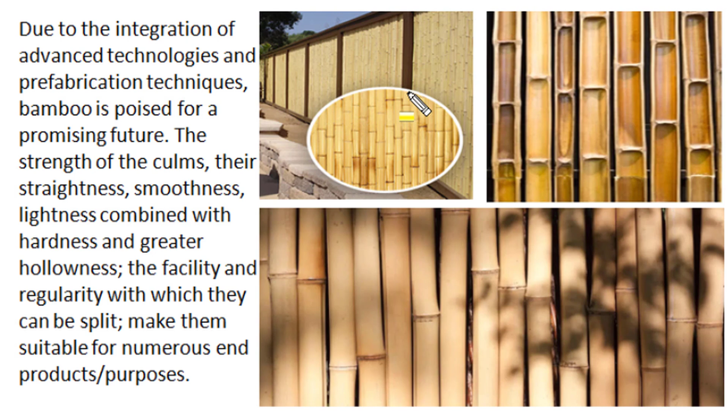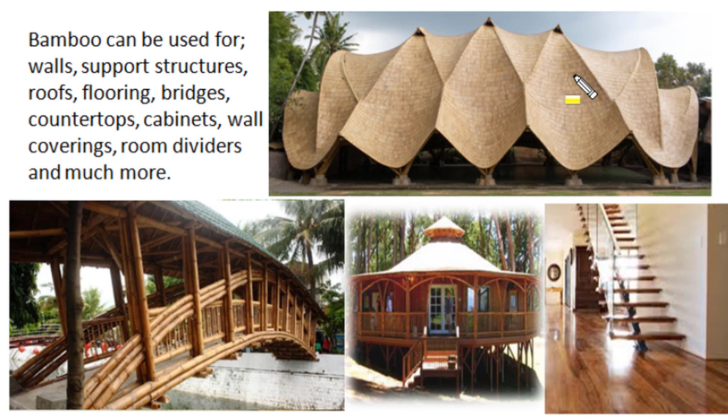The facility and regularity with which they can be split make them very suitable for numerous construction related products and purposes. Bamboo can be used for walls, support structure, roofs, floorings, bridges, stairs, cabinets, wall coverings, room partitions, and much more construction applications. Let us understand strength of bamboo.

Technically, bamboo is a fast growing Poaceae family grass, and in between two nodes in internode region, bamboo poles are hollow on the inside, but due to septa structure at node, bamboo got very good stability. If we understand cross section of bamboo, bamboo got short lengthwise fibers arranged in a typical manner to provide good enough strength to bamboo culms, which makes bamboo culms particularly sturdy, resilient and flexible. And with time, when it becomes dry, it becomes harder.

So we can say bamboo is a lightweight construction material with exceptional strength. The hollowness in internode region provides lightweight to bamboo, and its strong thick wall provides good enough strength, and at node the typical structure provides stability and strength to bamboo culms.

We can say bamboo got a combination of both compressive strength just like concrete and tensile strength just like steel. So this material bamboo got dual property of concrete as well as steel. This makes it a very suitable material for building bridges and other structures that require support and stability.

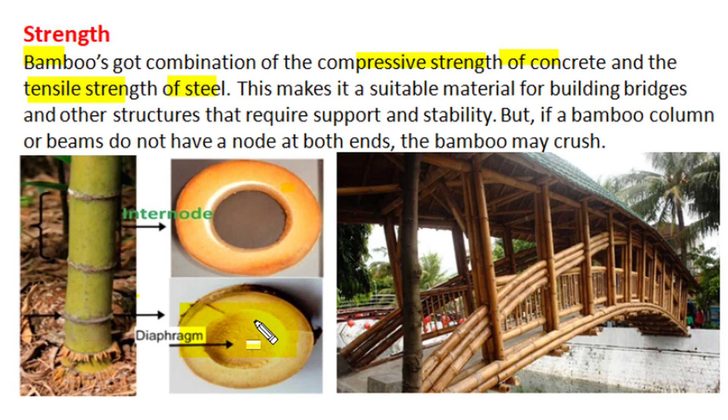But if a bamboo column or a bamboo beam do not have a node at both ends with this typical cross section, the bamboo may crush. So while selecting column height or beam length, we have to select a typical bamboo with node at both ends.

Bamboo building structures can have very good flexibility and resilience, and that makes them, with their lightweight, ideal construction material for seismic active areas for building construction. Bamboo can withstand heavy loads as well as extreme weather conditions. Bamboo poles can be used as columns or beams in construction of any house or other building, and bamboo provides a strong and stable structure to that construction.

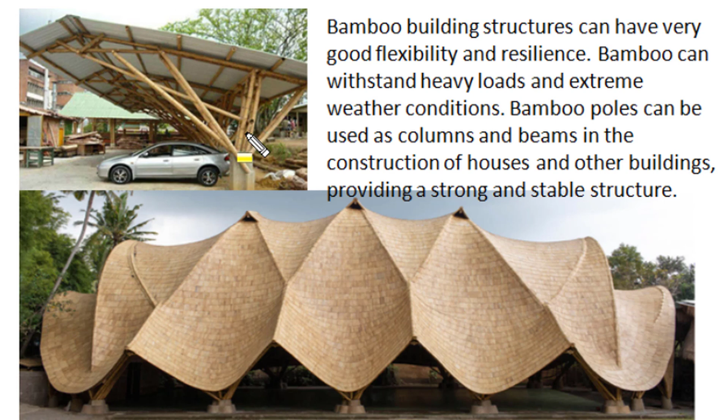Let's understand durability of bamboo. Bamboo is naturally resistant to water damage, decay, or other weather related wear and tear during cultivation and up to harvesting. And if it is properly treated and dryness is ensured, it can remain strong and sturdy for many years without much maintenance. If bamboo is properly used in dry state and treated for sugar removal, it can also resist pest and rot attack, and that makes a very durable and long lasting application of bamboo in any construction project.

If after water leaching of bamboo culms they are treated in borate solution and then a slow and steady uniform drying process is carried out, then with that proper treatment and afterwards little maintenance, bamboo structure can last up to 20 to 50 years, and some structures are in existence after even a longer period.

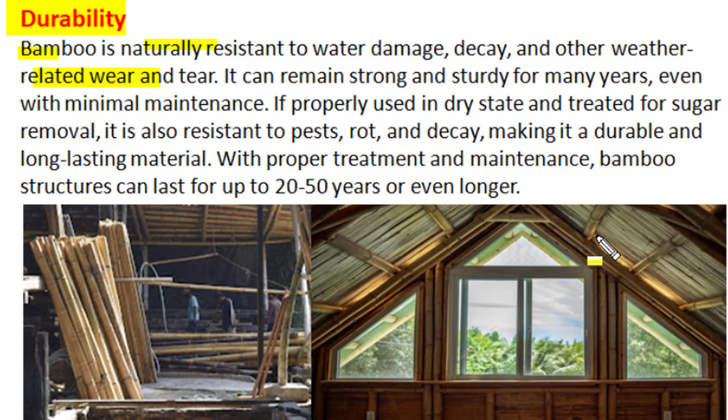Bamboo is also very cost effective in construction industry. Bamboo is considered as cost effective material due to its fast growth rate, low maintenance during cultivation and harvesting, and versatility in several construction related applications.

After harvesting, treatment and installation of bamboo for construction work is fairly simple. It is easy to cut. There is no bark to peel during processing. Bamboo also grows in many regions around the world, and being very light in weight, it is ideal to handle, transport and store. So we can say bamboo is a highly renewable, fast growing and very economic raw material for our future construction industry.

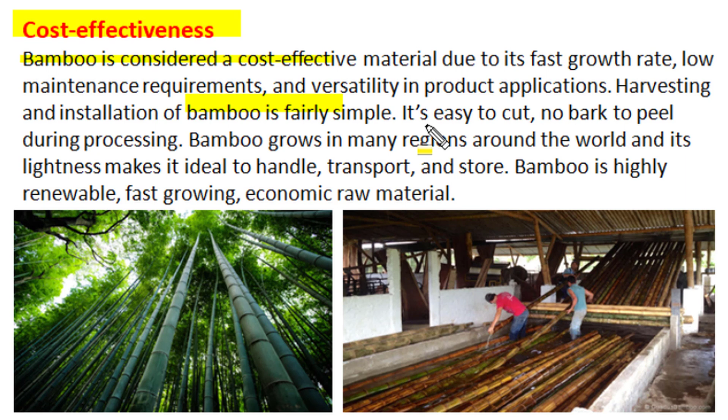Bamboo is also an eco-friendly material used in our construction industry. Bamboo is an absolutely renewable source that grows very quickly and can be harvested without causing damage to the environment, as it won't need chemical fertilizer or pesticide during its cultivation. Bamboo has a unique ability to absorb and convert carbon dioxide into oxygen from the atmosphere. So it has a negative carbon footprint, and when it reduces carbon dioxide from our atmosphere, it also helps in controlling global warming and climate change.

So we can say when bamboo is used as a construction material, our construction project has less carbon footprint, and that makes it an effective tool to mitigate the problem of climate change. With high demand of bamboo for the construction industry, there is no problem related to its availability. Bamboo is the fastest growing plant on earth. This incredible plant grows between 3 to 30 centimeters per day. That means some bamboo varieties can gain 1 meter length in just a week, and many species are fully grown after only a few months, at which point they may measure up to 40 meters in height. This means that there is an abundant supply of bamboo to sustain the growing needs of the construction industry.

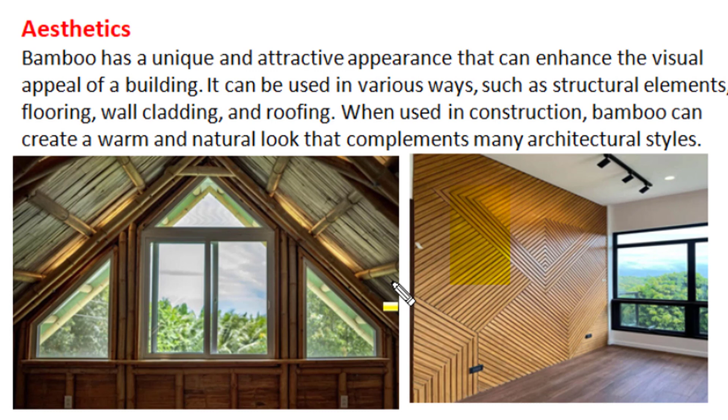Bamboo also has a great aesthetic appeal. Bamboo has a unique and attractive appearance that can enhance the visual appeal of any building. It can be used in various ways, such as structural elements like columns, beams or roofs, or it can be used as flooring or wall cladding. When bamboo is used in construction, it can create a warm and natural look, and this natural look of bamboo complements many architectural styles of building construction.

Due to its strength, resilience and flexibility, bamboo is an excellent choice for construction of arches, curved roofs and other architectural features that require a certain degree of flexibility. The flexibility of bamboo allows it to bend and curve without breaking. Bamboo can be carved, molded and arranged into any desirable form due to its light weight and flexibility, and that can produce eye-catching, aesthetically appealing structures as shown here.

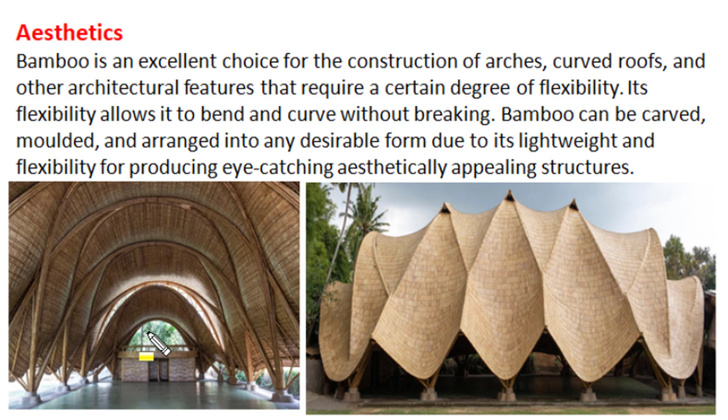All bamboo products used as wood substitutes, whether they are bamboo panel boards, bamboo veneers, bamboo corrugated roofing sheets, or bamboo particle boards, have appropriate physical and mechanical performance in terms of hardness, stability, strength, and durability. Bamboo is replacing wood in several areas, and these products are all gaining attention in this new eco-sensitive emerging market. Bamboo products have great opportunity in various applications.

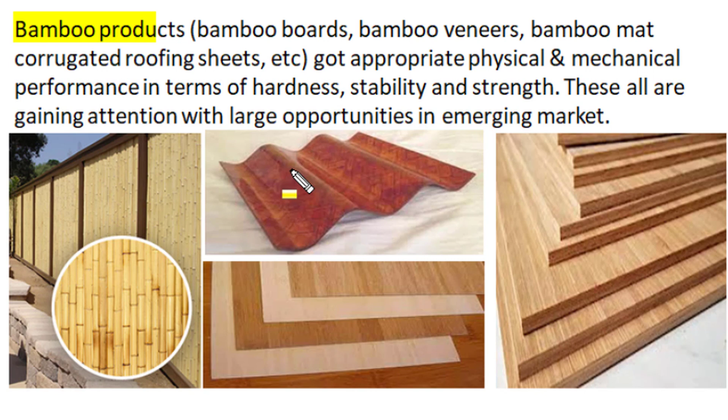Bamboo also has some disadvantages when used in building construction, and one should take care of those disadvantageous conditions. One such disadvantage is susceptibility to deterioration. Bamboo has high starch and sugar content, and if in the working environment where bamboo is used the level of sap or humidity is high, then even during cultivation the plant is rather vulnerable. And if bamboo is not properly treated and maintained, it is susceptible to termite and pest attack, which can weaken and destroy its structure, strength and durability.

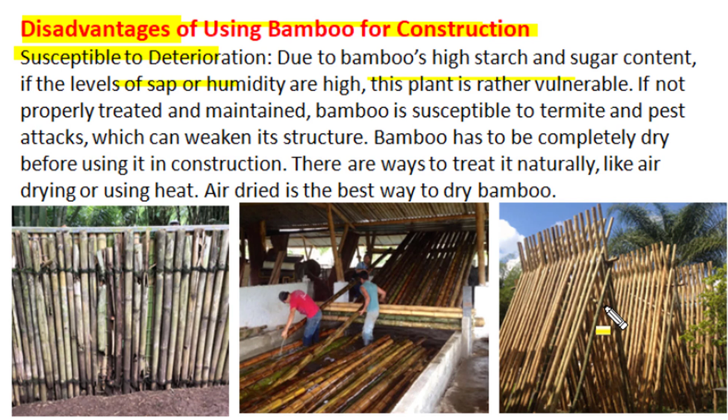So when bamboo is used, it must be properly treated. It must be washed and rinsed in flowing water and then treated in borax water that can remove its sugar and starch content. Then bamboo has to be completely dry before one uses it in construction, and one good way is drying bamboo in natural air uniformly and at a slow rate. So over a considerable duration of 3 months to a year, bamboo gets thoroughly dried, and then it is quite rugged and durable when used in any building construction.

Another disadvantage of bamboo in building construction is climate sensitivity. Bamboo is a tropical plant, and it is not suitable for areas with extremely cold or extremely hot temperatures. In those conditions it may get brittle, and cracks may form in bamboo clumps when it is used in very cold climates, and those cracks ultimately destroy the bamboo structure. Bamboo also gets warped or twisted when used in a hot climate with high temperature conditions. Cost also becomes a considerable factor in bamboo application, especially when it becomes quite costly.

When bamboo is used in construction, only matured bamboo of 4 to 6 years with proper drying and borax treatment can be used in construction, and such matured bamboo after proper treatment and drying becomes quite costly, and in those conditions bamboo can become more expensive in certain areas than conventional building materials like cement, concrete or steel. Bamboo construction also becomes costly when specialized techniques and skills are required to make bamboo joints and bamboo structures.

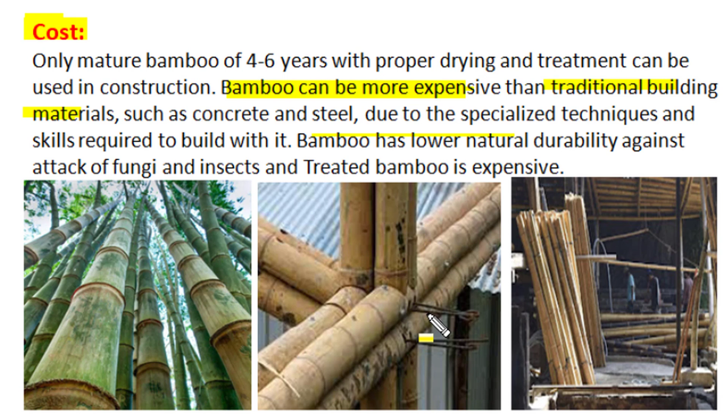Bamboo has lower natural durability against attack of fungi and insects, and if one has to enhance durability and lifespan of bamboo construction, he has to treat that bamboo, and treated bamboo is expensive, so that makes bamboo construction costly in certain areas. So there are some challenges associated with progress of this eco-friendly construction material in present building applications. One challenge is sourcing of good quality durable bamboo, that too in large quantities. Another challenge is lack of awareness and expertise among designers, architects, engineers and builders regarding bamboo applications.

Bamboo is also difficult to work with as it is prone to splitting and cracking if not properly handled and treated. Bamboo culms are irregularly shaped, not of standard length, and they won't have any uniform thickness. So standard design construction with bamboo culms becomes difficult. Formation of secure joints between irregular ends of naturally grown bamboo poles is a challenge. The structural efficiency and strength of those traditional joints is also low, and we need technical development and a lot of research to produce more effective jointing methods in bamboo construction.

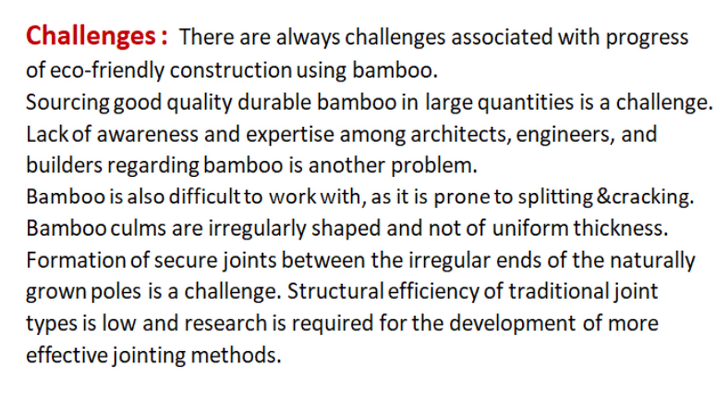We can summarize challenges ahead of bamboo application, which we have to face before bamboo becomes a popular building construction material. One is increasing durability of bamboo construction. Presently, if bamboo is not properly maintained and treated, its life remains only 5 to 6 years, and for a good durable building structure we need bamboo durability up to 50 years, and for that we have to properly treat and maintain bamboo before using it in building construction.

We have to develop efficient jointing systems so that strong durable structures of bamboo can be produced with ease and efficiency. We have to develop prefab systems so that bamboo irregular in length, diameter and thickness can be grouped together to produce standard structural items. We also have to build capacity of artisans so that skilled workers for bamboo structure work can be made available to any construction site. Also, in urban areas, we have to improve acceptance of bamboo in building construction.

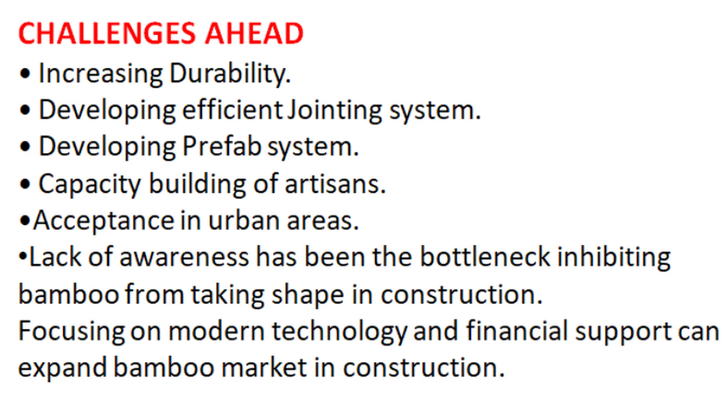Lack of awareness among all end users, designers and architects has been the bottleneck inhibiting bamboo from taking its right position in the construction industry. We have to focus on modern technology and provide requisite financial support to expand the bamboo market in the construction industry. The next two examples of bamboo construction can give an idea of bamboo's future in building construction.

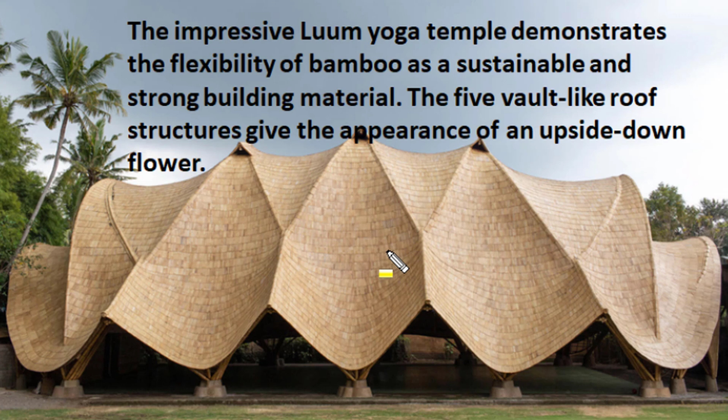This impressive yoga temple demonstrates flexibility of bamboo as a sustainable and strong building material. This vault-like roof structure gives an appearance of an upside down flower, and it gives a great aesthetic and natural appeal to yoga practice in this structure. This is a modern twist of building construction in bamboo.

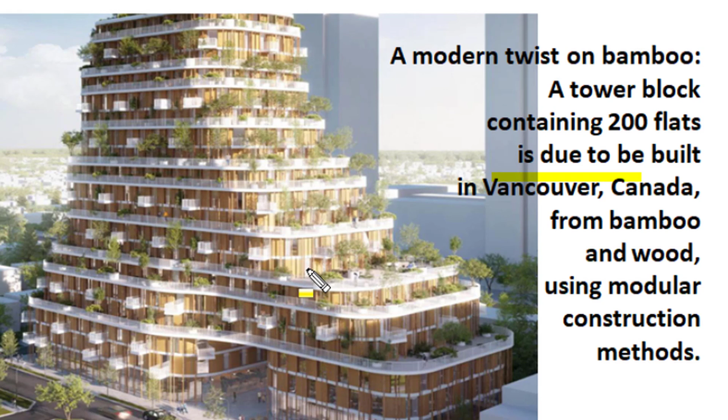In conclusion, we can say bamboo is a sustainable, durable and aesthetically very pleasing green building construction material. We can sum up that bamboo is one of the most versatile, promising and eco-friendly construction materials. Indeed, the future of sustainable architecture design and green building construction largely depends on production and utilization of bamboo. When bamboo is cultivated, it absorbs more tons of carbon dioxide than any other tree, and due to its extremely high growth rate, it is almost renewable.

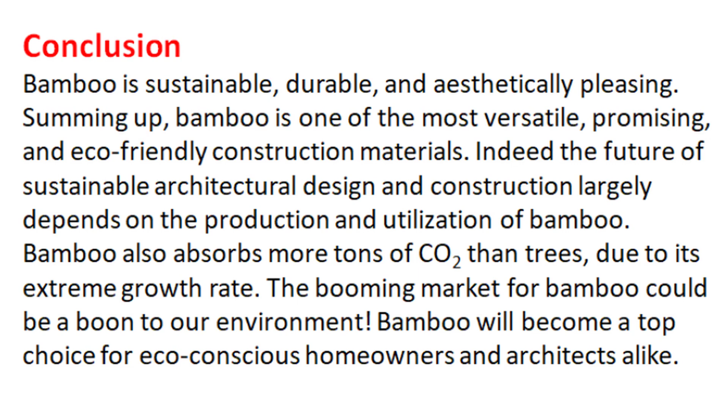The booming market for bamboo could be a boon to our environment. When bamboo is used in large quantum in the construction industry, it will be cultivated and harvested in greater amounts, and that will reduce carbon footprint in our environment and will definitely help us to mitigate adverse impacts of global warming and climate change. So bamboo will become a top choice for eco-conscious homeowners and architects simultaneously.

We hope this second learning video on bamboo along with its first part has completely explained key properties and considerations of using bamboo as green construction material. We hope this will enhance use of bamboo in building construction.